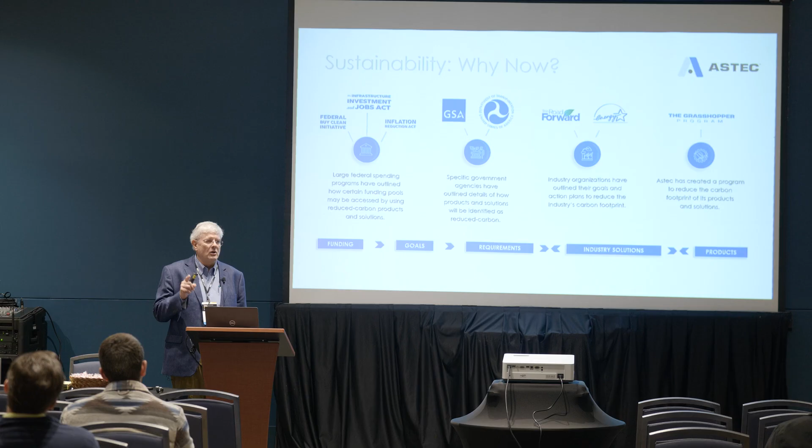So in this room right now are those who believe in man-made global warming. Not only believe in it, but believe that anything and everything that can be done should be done to address it. And it's actually a moral issue with those folks. That's one end of the spectrum.

There are other folks, undoubtedly in this room right now, who believe just the opposite. They believe it is total BS. They believe it's either at best a myth, at worst a hoax by the political elite on an ignorant public. Those are the two extremes, and there's everything in between. If you're like me, you're influenced by the last YouTube video you watched on the subject. But I say that to say this. Regardless of the facts, this is a fact also.

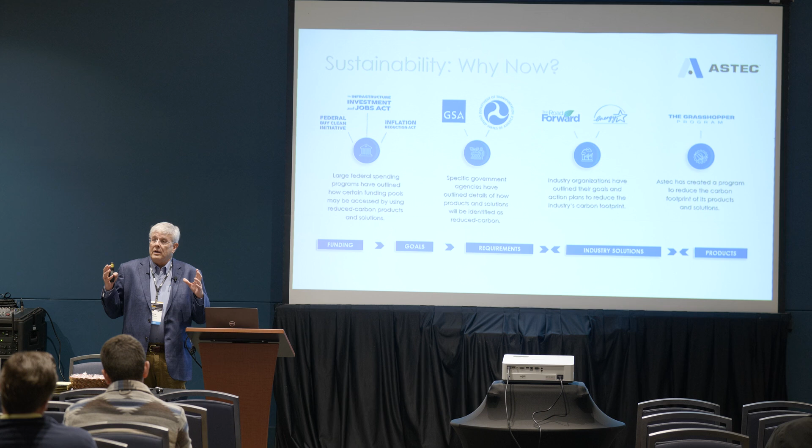There's a lot of changes, and these are some of the drivers in place for all those changes. I'm not going to read all of them, but these changes have the momentum of a freight train coming down our tracks. And our industry is being impacted right now, and it will only ramp up. Fortunately, my job is kind of cool in that I don't have to take sides. I don't even have to have an opinion on this subject. All I have to do is provide solutions to you folks that have Astec plants or have asphalt plants, period.

And so we're going to talk about what drives innovation. We're going to talk about what you can do today with your own equipment to lower your carbon footprint. For decades, we've talked about these things, but we talked about them in terms of make more money, be more profitable. Now it's how to lower your carbon footprint, because a lot of the things are the same.

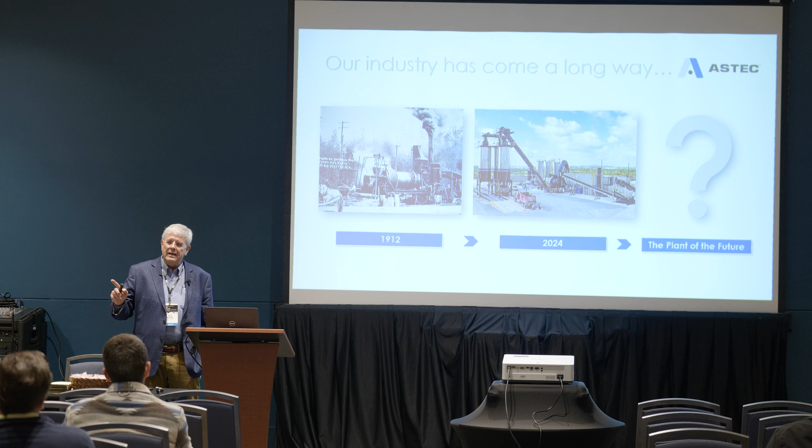So the plant on the left is kind of where our industry started with asphalt plants. That's a Warren Brothers plant, 1912. If that reminds any of you of the plant you have right now, we need to have a short conversation right after I get through talking. Now, the photograph in the middle, that's pretty much what asphalt plants look like now. And I'm going to attempt to tell you what they're going to look like in the future. My opinion is they're going to look like that, pretty much. You think, well, that's not very exciting. I've got some slides at the end that really show what they'll look like, but the main parts of the plant will look like that.

Technology, the application of technology. I was about to say, underneath the paint, nothing is the same. I doubt the paint is even the same. So, why am I talking about Mustangs? Well, I love Mustangs for one thing. But I say asphalt plants will look a lot like they look now, but the technology that drives these plants and makes them perform, I think will look a lot different in the future.

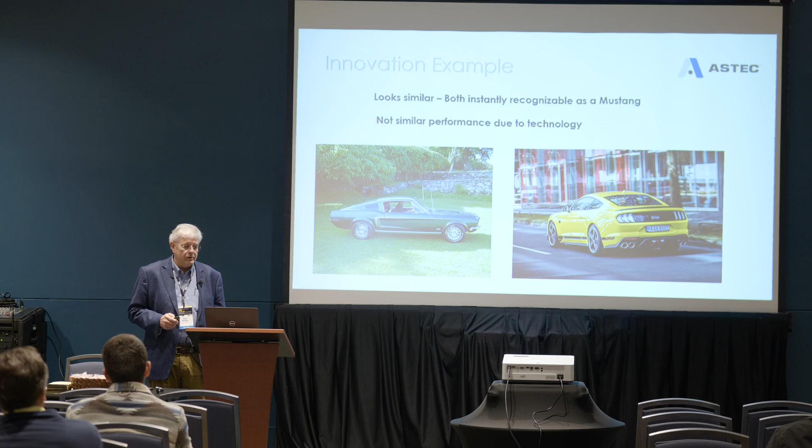Regulation is one. Now, regulation has touched people in different states, with whether you have to have lime and how you add lime to mixes and things like that. In California, it's touched in a big way, and we're going to talk about that a little bit. But in the future, regulation is going to be a big driver in things that we do when we design our asphalt plants, because you will need solutions for the regulations that will come your way. And of course, competition is always a thing.

So these things, economics, mix design, regulation, competition, they create a need. And we take available technology and we adapt and innovate, and we kind of put the new technology together like a new recipe. Here's an example I like to use. Uber. Uber was a disruptive technology to transportation. You'd have to agree with that. What is Uber? It was a combination of 3 existing technologies. It was nothing new. It was a different recipe.

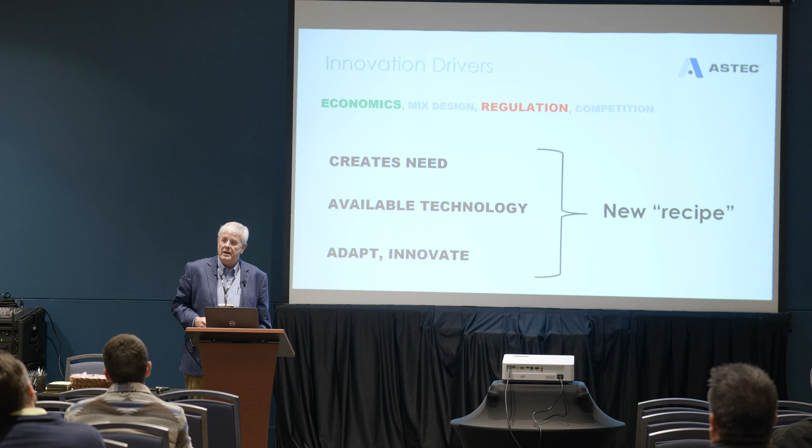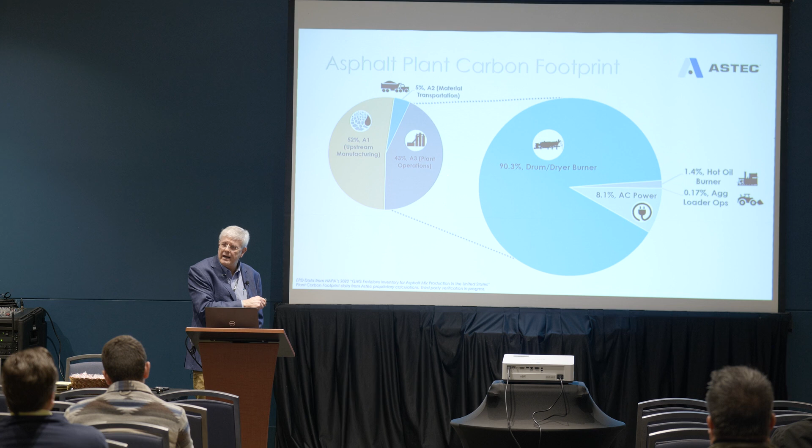So when we talk about the carbon footprint of an asphalt plant, and this is something we're going to see a lot in the future, we have the upstream, getting the materials, the manufacture of the aggregate and getting it to the plant, the transportation, and then we have the plant operation. This part right here, 43% of the carbon produced when you make a ton of asphalt is from the plant. The rest of it is from somewhere else. Well, we're going to talk about the asphalt plant today.

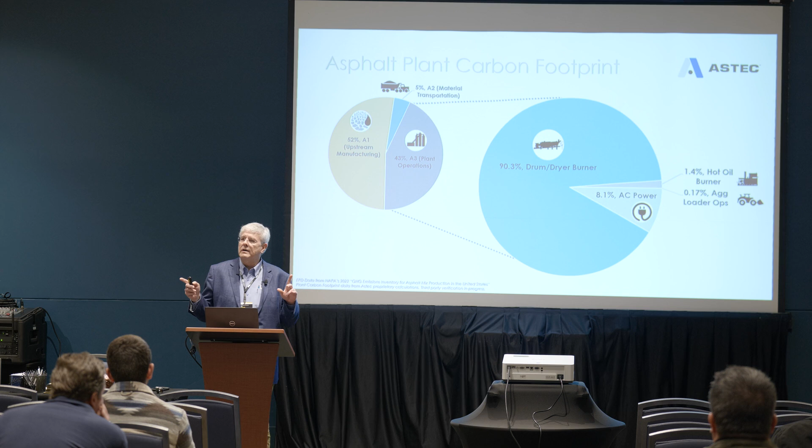Now, if we just look at that bit about the plant, 90% of the emissions or carbon that comes from the asphalt plant comes from the drum, the drying process. And it's important for us to have an idea of these percentages, because when you guys start thinking about, should I spend money on this, should I spend money on this, what should I do? You've got to have a foundation of understanding about whether it's really going to move the needle or not.

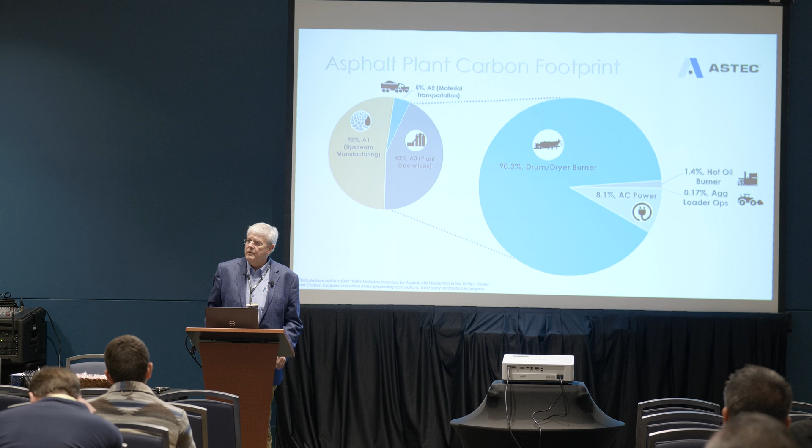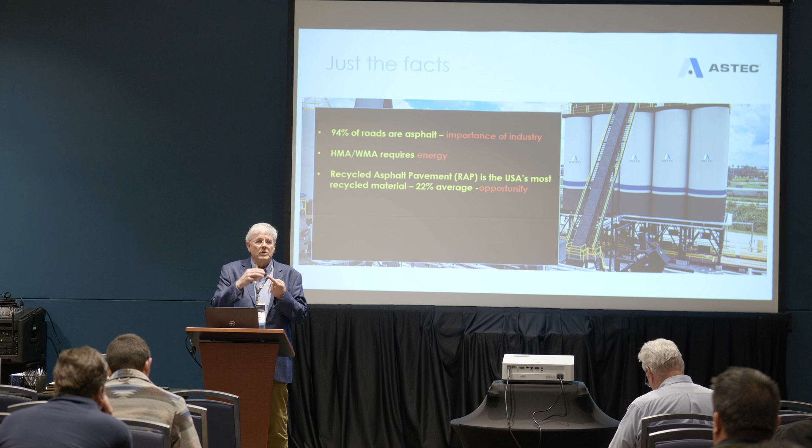You guys reply to surveys, and you say the 2 main reasons limiting you from running more RAP are specification and availability. The people that write specifications are going to get a lot of pressure to raise those numbers. So the people that have RAP will have opportunities to use more of it. We'll speak about that a little bit later.

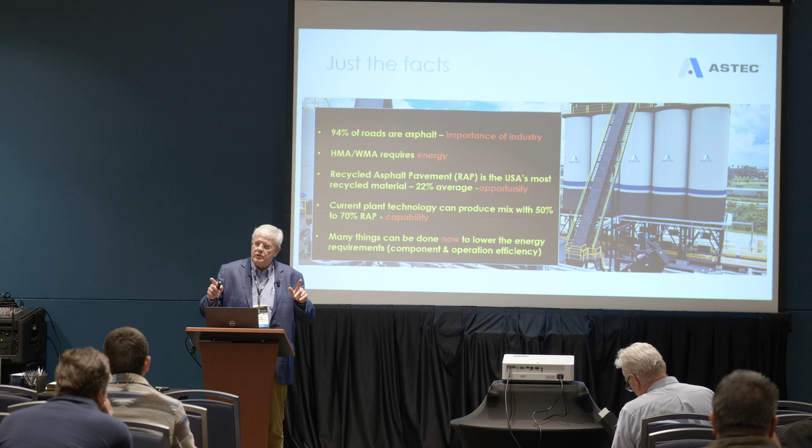Hey, here's some good news. Current plant technology, and I'm not talking about Astec, I'm talking about technology in general, can produce mix with 50 to 70% RAP. So we have capability. So our industry is super important. Yeah, it takes energy to make asphalt. We have a huge opportunity with RAP still. And our plant technology can run a lot more RAP than the average that we're running right now. And there are many things that can be done right now at your facility to make a difference.

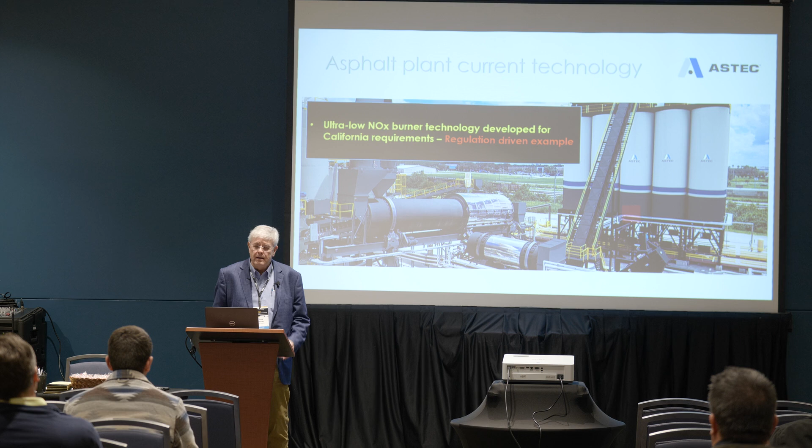Low NOx burners, ultra low NOx burners, have been the standard. You have to have that in order to have a plant in California, and that's been that way for 25 years now. 25 years. And why I say that, we're not in California. That's just an example of how regulation can drive. In a low bid environment, let's face it, you guys aren't going to do anything you don't have to do, because your number one mission in life is to get the bid. So you just can't start buying technology your competition doesn't have to buy. Regulation is the only time that everybody buys the same stuff.

In the future, well, for a long time, what fuels do you use? You use the cheapest fuel that you have available. Well, in the future, we will be told which fuel we're going to use; it won't be based on that. That's been the case in California for a long time. You run natural gas, or you run propane, and you don't run anything else.

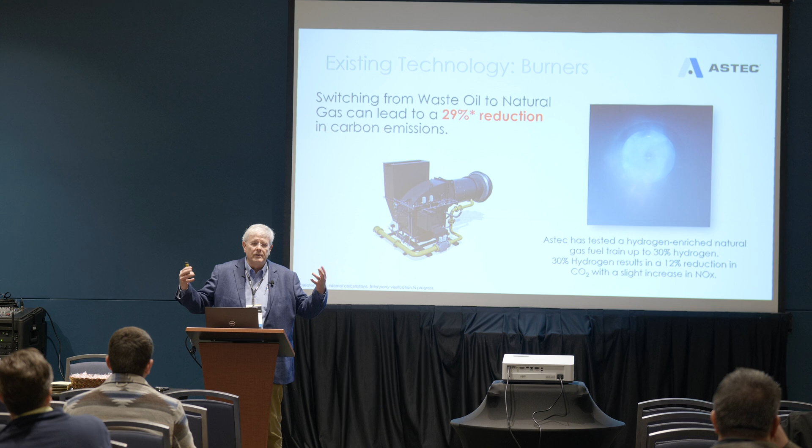Just switching from waste oil to natural gas, just to give you an example, can reduce the carbon emissions 29%. So as these facts start permeating through our society and people start knowing these things, we'll be mandated which fuels to run.

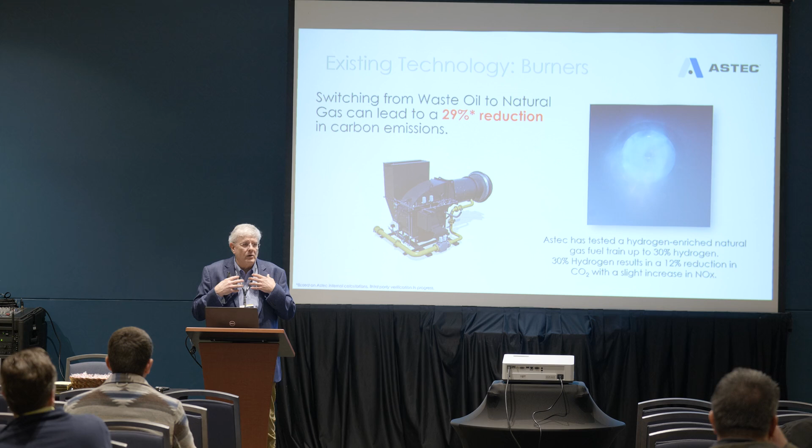There's a lot of talk in certain parts of the country and the world about running hydrogen through our burners. It's not hard as a manufacturer. That's not a challenge for us. We've actually run some trials. The challenge is having hydrogen supplied to your plant. If and when that ever occurs, we have the burners that are available to do that. Not a biggie there.

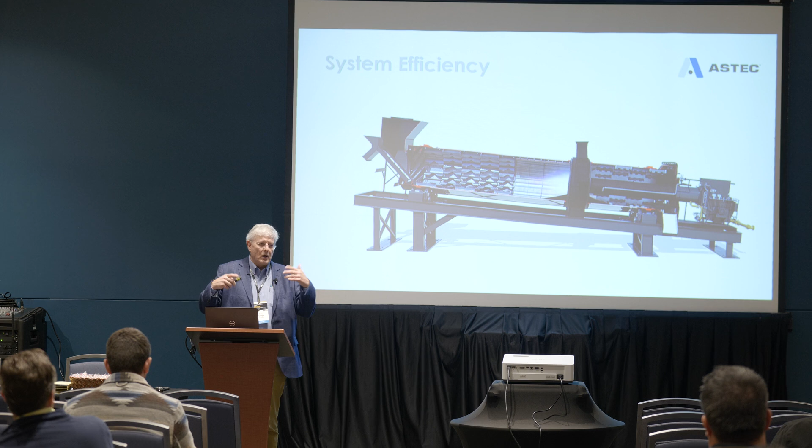Now, I said 90% of the emissions that come from an asphalt plant come from the drying process. What's going on there is we have cold, wet aggregate coming into the dryer. We have hot, dry aggregate coming out. Now, what goes on in the middle is important. The greatest part of our heat from the flame goes into the aggregate. Part of it goes into the steel.

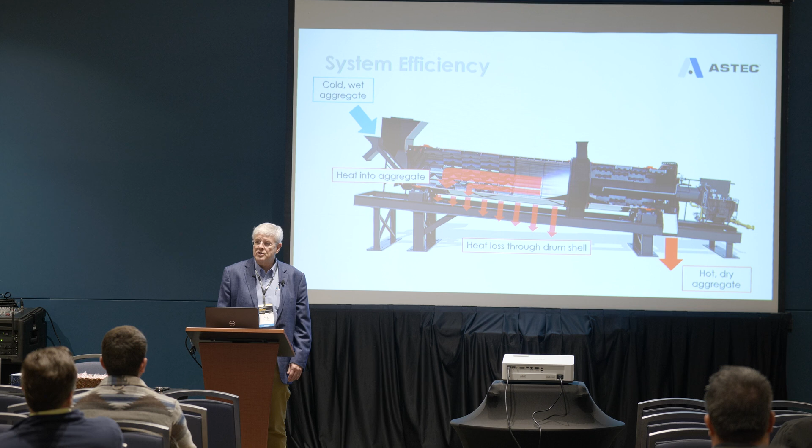Actually, everything that gets hot at an asphalt plant besides rocks, all the metal, everything that gets hot is a waste of heat. In a perfect world, only the rocks get hot, but we don't live in that world. So other things get hot. So it's our job to mitigate all the energy lost to that other stuff. Our drum shells get very hot, and they radiate heat away. We can insulate them. We're going to talk about that in a minute.

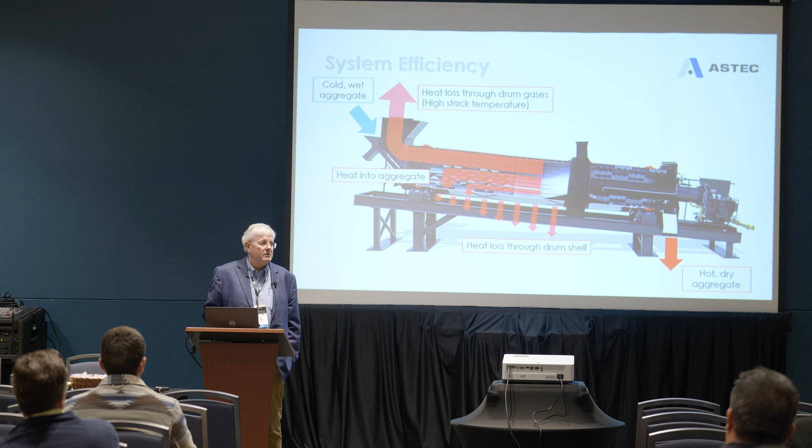The other part of the heat that leaves the process is the heat that doesn't go into the rocks. It goes out the dryer in the form of hot stack gases. Can we manage that? Yes, we can. We have technology now that we can manage that.

Now, how can we control the amount of heat that leaves the drum? In our industry, that's commonly called the stack temperature. That isn't the stack, it's really the temperature of the gases that go out of the drum, but using the slang of our industry, we'll call it the stack temperature.

Usually, we just live with the stack temperature. If it's way too high and our baghouse can't handle it, we do some things to the dryer to bring it down. We'll go through all those things. If it's too low, we do some things inside our dryer to bring it up. The problem comes in when you run both types of mixes, and now what do you do? Are you crawling the drum every day? There's technology that makes it where we don't have to do that anymore.

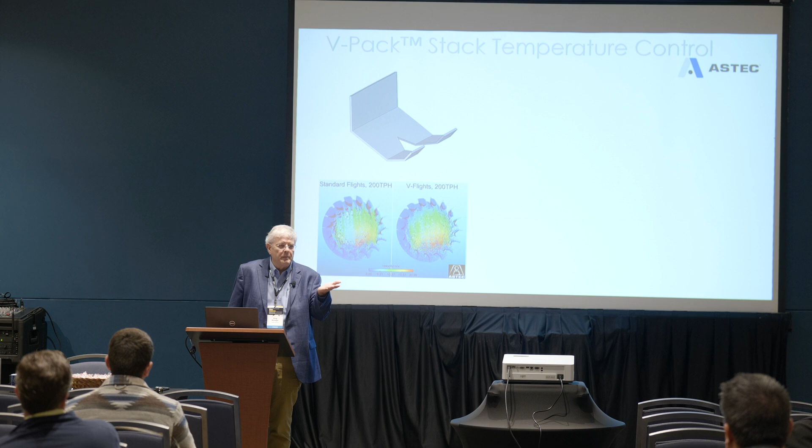We call it the V-PAC, but really it's just this. We have a design of flight that will shower pretty well if it's not that full of material, and it showers well if it's really full of material. And then we add to that variable frequency drive technology. We call it VFD, but it's variable frequency drive.

So the combination of those flights that work with low or high levels of material in the drum, and being able to slow the drum down slightly or speed it up slightly, enables us to bring the stack temperature down. That's energy that escapes. Bring that stack temperature down, or raise it up if we're getting in the danger zone of mudding up our baghouse. So from inside the control house, your operator now has control over how much energy goes into the rock and how much energy exits the drum.

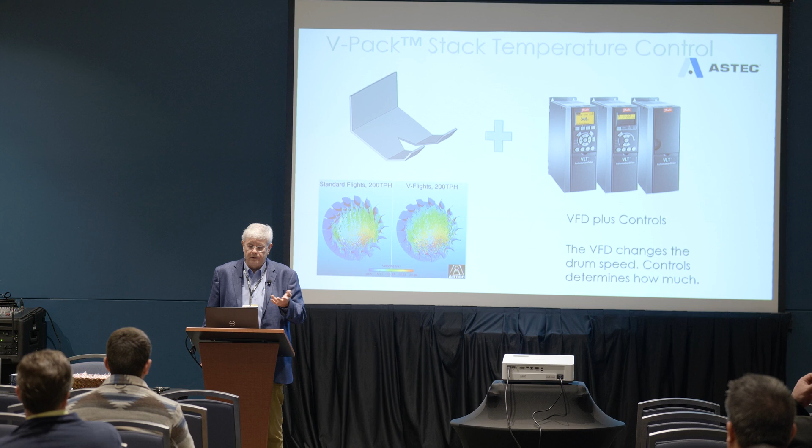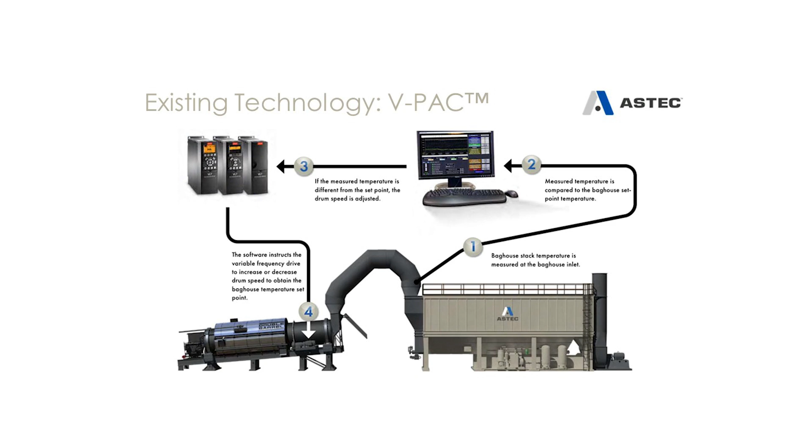In fact, I changed these slides just for this. We call it a stack temperature control, but you really could call it carbon control in today's climate, because that's really what it is. That's what it looks like schematically. We sense the temperature of the gases going to the baghouse. We've input to the computer what we would like the stack temperature to be. The VFD control changes the rotational velocity of the drum to either speed it up or slow it down to obtain that temperature of the set point. So we just have control over that part of our process.

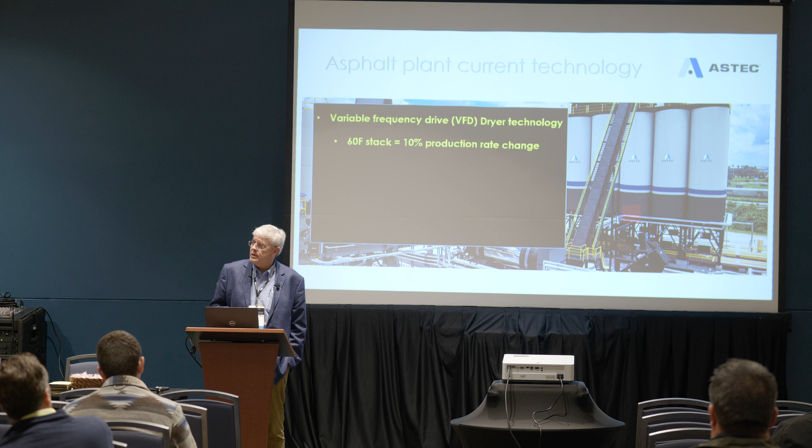Now, here's a number to remember, and I'll give you a memory trick that I use to remember these numbers. For every 60 degrees Fahrenheit that your stack temperature goes up or goes down, it'll make a change in the production rate of your plant of around 10%. It'll cut your maximum production rate around 10%. That could be in the bad direction, could be in the good direction.

For every 60 degrees Fahrenheit that the stack temperature changes, there will be around a 4% change in the fuel required to make that 1 ton of mix. It could be more fuel or less fuel, depending on whether the stack temperature is going up 60 degrees or down 60 degrees.

Also, the things that we used to have to do when we crawled inside a drum at night, in the dark, in hot drums, there's no way to do that safely. I don't even know another way to say it. So there's that aspect too. And this can also affect the maximum production rate. It can easily take a 250 ton an hour plant to a 300 ton an hour plant, and you can get more tons out that day for the same fixed cost.

Now, how do you remember all that? Here's how I remember it. For some reason, 60, 10, 4 are three numbers that are easy for my brain to hang on to. 60 degrees Fahrenheit change in the stack, 10% on the production, and 4% on the fuel. 60, 10, 4. Everybody got that?

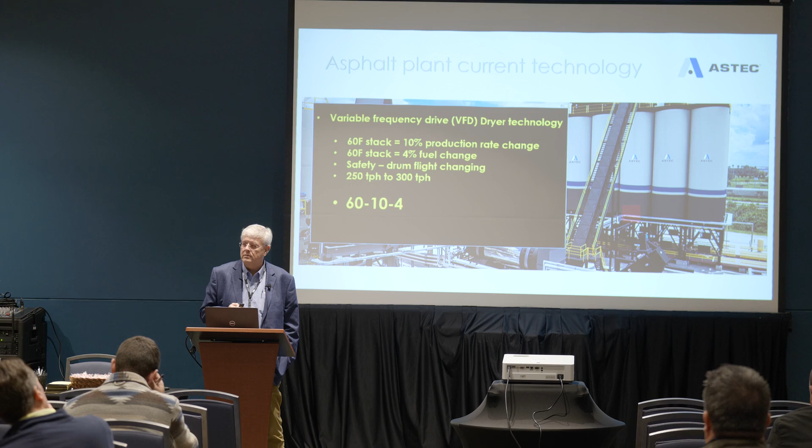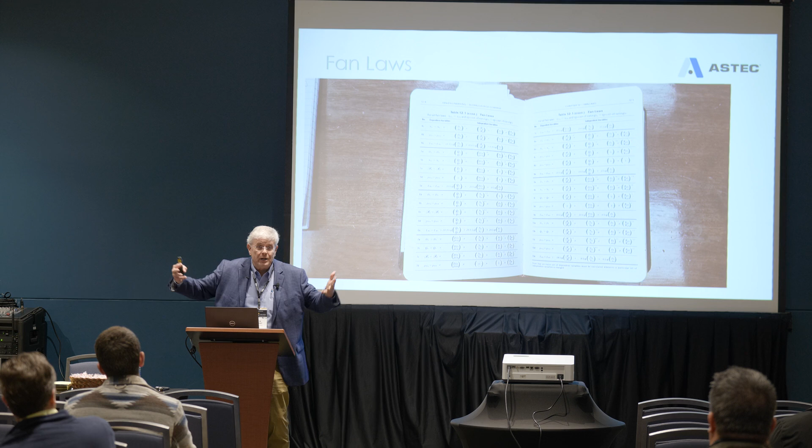Okay, this is a photograph of a book that was sitting on my desk. It's the fan engineering book. It's the Bible of fan engineering. And on these 2 pages are mathematical formulas called the fan laws. And I photographed it and stuck it in here. What these fan laws tell us is, when we use VFD technology to speed up or slow down a fan, how does it affect the output, CFM of the fan? How does it affect the static pressure that the fan produces? And how does it affect the power required to run that fan?

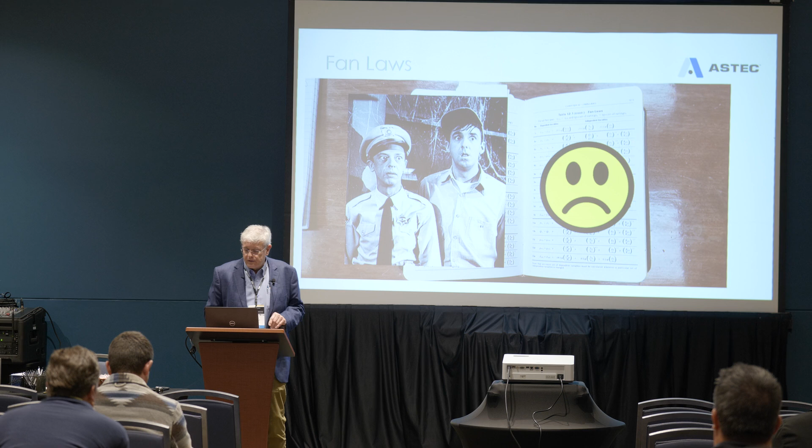And this is important to know. And what I thought we would spend the rest of our time doing is going through each and every one of these formulas so that you understand each one by the time you leave here. You ready? Yeah. That's often the look I get, and this is how you're feeling right now, so I know that. Here's what you have to know.

For a centrifugal fan, let's say your baghouse exhaust fan, if you use VFD technology to speed it up or slow it down to match your plant production, if you slow the exhaust fan down to 80% of its top end speed, it only requires 50% of the electrical energy to run it at that point. If we slow down a centrifugal fan, for example, the burner fan, if we slow it down 50%, which is like every day at your plant, it only requires 12.5% of the energy. Those are like crazy savings.

There's lots of other benefits on those exact drives too from using that technology. But this technology is commonly available from many manufacturers. It's affordable, it's reliable. All new plants just have this, but there's not hundreds, there's thousands of plants in the United States of America that don't have this technology because they didn't come with that technology. So, okay, I've talked about the math of it and what it means for energy.

To me, the best way to describe the difference between using speed up or slow down technology on a centrifugal fan versus an outlet damper, which is basically what we've been using for 100 years: if you're in your vehicle driving down the road and you kept the accelerator to the floor all the time and you used your brake to modulate the velocity of your vehicle, that would be insane, wouldn't it? But that's like using an outlet damper on a fan.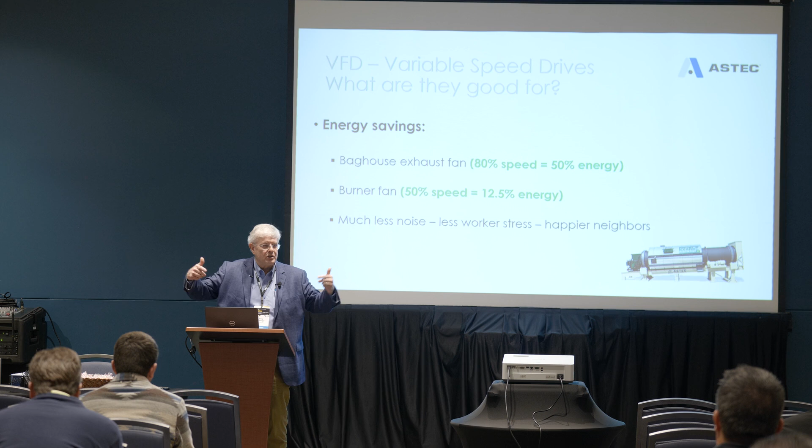The way you really drive it, you vary the speed of the engine pretty much. We'll forget about the transmission. You vary the speed of the engine. That's like using a VFD to speed up and slow down the motor on your baghouse exhaust fan. Huge energy savings. So these are things that we can do now on your existing plant.

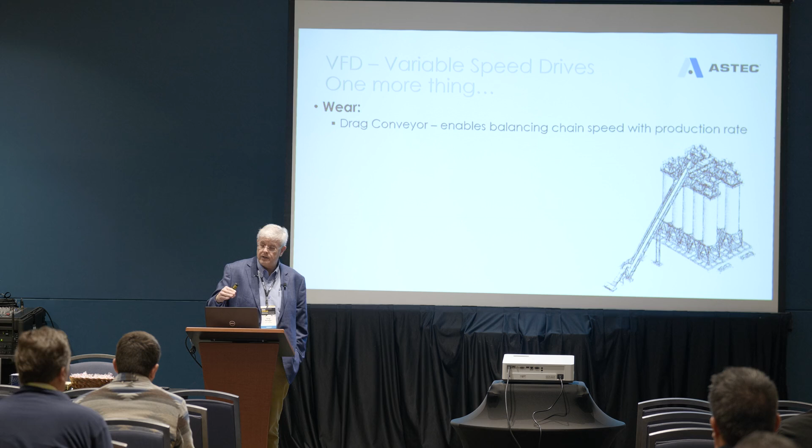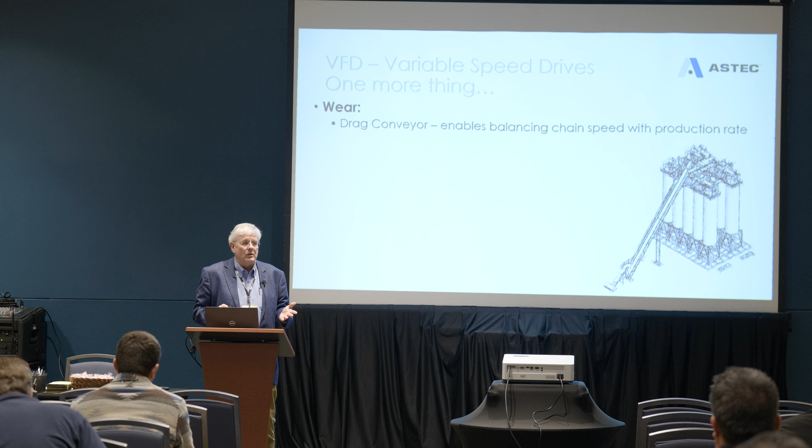Other places that VFD technology is used on plants, not so often, but we do have very successful customers who do this. They will use a VFD on their drag conveyor, the drag slat conveyor that takes the mix from the drum all the way up to the top of the silos. And what that does, it slows the speed of the chain down to match the production rate, so that basically you don't run the drag any faster than you have to for the production rate.

It doesn't really save any energy. It's really done to decrease the wear. And most of our customers who do this, they tell us they have about 40% less wear on their drag. Does that relate to carbon in any way? I think it does. It's not a direct thing that you can measure. It's not like you can tell some regulator, hey, I used to use this much fuel to make a ton of mix, now I use this much. But anything that lasts longer is a very carbon-friendly thing. So less maintenance equals less carbon.

Go electric. Electricity is not the cheapest way to keep things on your plant hot. In most places, it's not. Hot oil is. That's why most of you guys use hot oil. But in the future, this industry will be using electricity everywhere it can be used. When we sell plants in Europe, we don't even talk about hot oil. It's going to be electric in Europe.

And in fact, what we're seeing is asphalt contractors who may be in this room right now, who are owned by European corporate entities, are telling their plants right now, switch to electricity. Well, it costs more. We don't care. Switch to electricity. So that's even happening now. I've talked to contractors. We've had that very conversation.

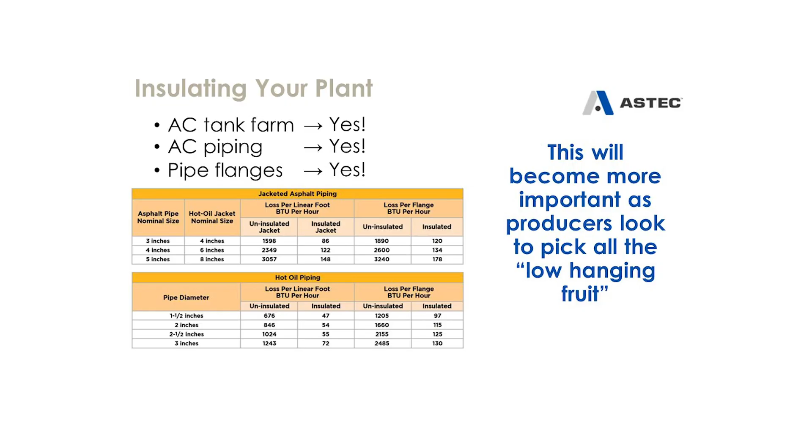So what all can be electric? Well, the AC tanks, of course. Even the hot oil heater can be electric. Even if we stay with hot oil, the hot oil heater can be heated electrically. The AC piping, the things on the plant that we have to keep hot, like the drag slat conveyor, the silo cone, those are electric now as a standard. The traverse and slat conveyors on top of the silo, all of that can be electric, like now. And the AC tank farm, the AC piping, the pipe flanges, all of that is yes, yes, yes. You don't even think about it.

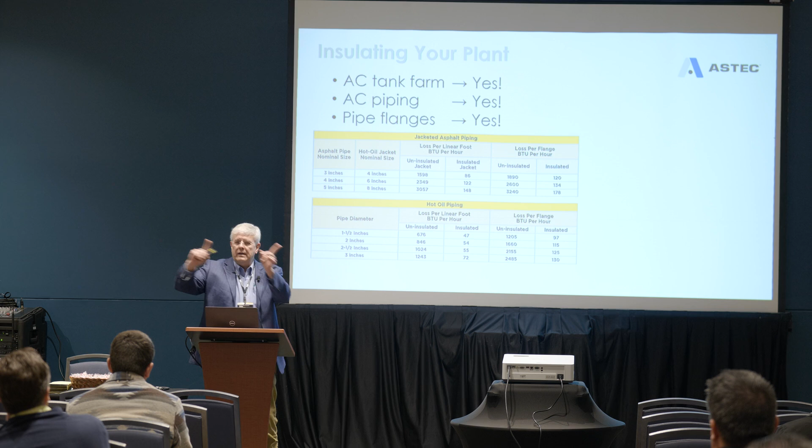Insulate those things. Even if you're in the category of you don't believe any of this man-made global warming, you want to do that for profitability. There are piles of data on how many BTUs you lose per foot of pipe and on pipe flanges, but just do it.

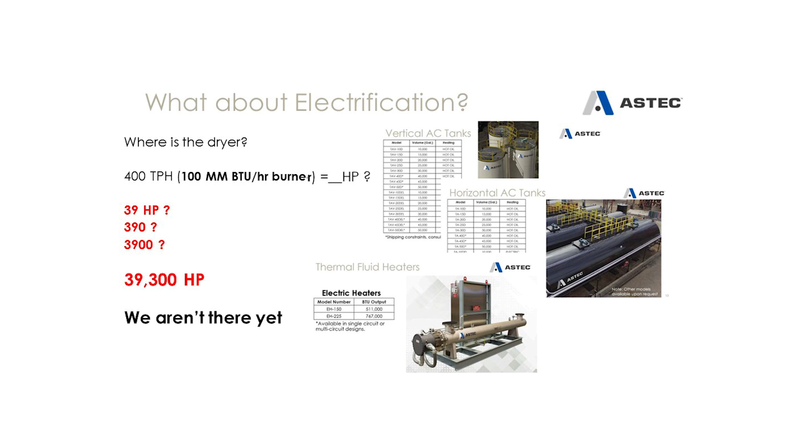Now, what about electrification? Of course, we've listed the components that are available right now. Well, you're thinking, he told us that 90% of the carbon produced when you make a ton of asphalt from the plant side comes from the dryer. And we can do things to make the dryer more efficient. And efficient in this context means make more mix with less fuel. We can do these things. So where's the dryer on here? I wish one of these cut sheets was about an electric dryer.

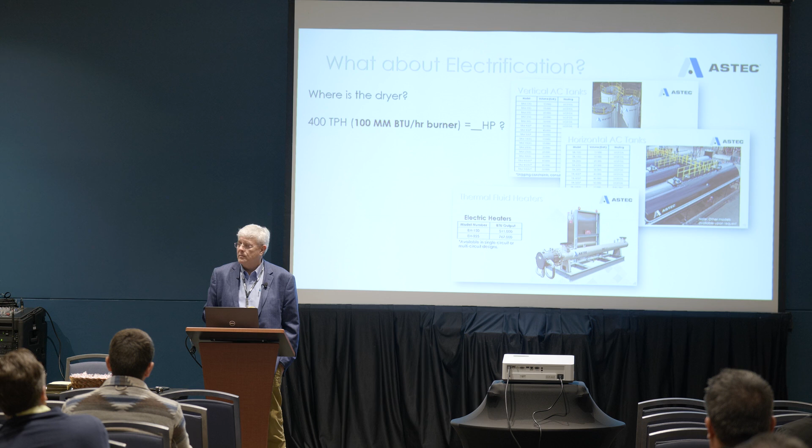But on a 400 ton an hour asphalt plant, on your 8-foot double barrels, the size burner on there is 100 million BTUs an hour. So what does that mean? It's hard to relate to that number because it's hard for our brains to wrap around BTUs per hour. But we can convert that number, 100 million BTUs per hour, to units that we're familiar with. Like we're all familiar with horsepower. We basically know that our vehicles have a couple of hundred, maybe 300 horsepower. Okay, so if we convert 100 million BTUs per hour to horsepower, what do you reckon that number is? Is it 39? Any takers?

Nobody wants to raise their hand for 390. Is it 390? 3,900? I saw a movement there, but you're scratching your head, weren't you? It's like an auction. I'm looking for movement here.

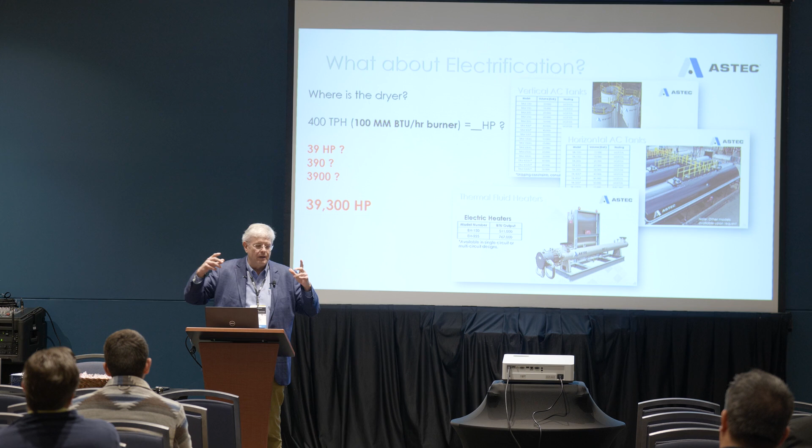Actually, if we converted that to horsepower, it would be 39,300 horsepower. That's a crazy number. That just illustrates really the beauty of an aggregate dryer, rotary aggregate dryer, direct heat transfer, burning an inexpensive hydrocarbon with a very inexpensive burner right there. How much energy is transferred in that small space that if we had to do it with electricity, that's the horsepower that it would take to do that. So we aren't there yet, okay?

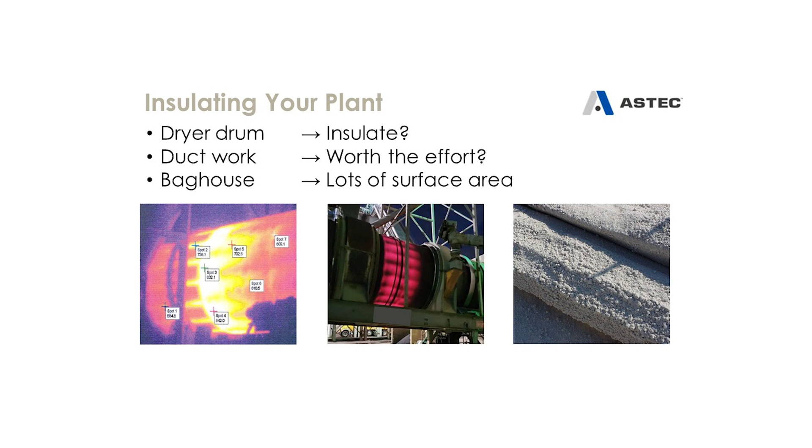What can be done now? Okay, insulate everything that gets hot? Almost. Almost. Why wouldn't you want to insulate everything that gets hot? So let's look at the drum for an example. I'll ask questions through here, but I'm going to go ahead and give you the answer to almost every question you could be asked about an asphalt plant. The answer is it depends. That's the answer to almost everything.

So, here's a couple of photographs of a dryer. The one on the left is a thermal image. Each temperature shows up as a different color. We have a special camera that takes these photographs. Right there, it's 842 degrees Fahrenheit. That sucker is hot. That's radiating. We're wasting heat like crazy right there, aren't we? Looks like we would be. So is it pretty obvious that we should insulate that drum? That's a question. Should we insulate the drum? Well, I just told you the answer to everything. It depends. Okay, thank you.

Well, that's 842 degrees, and I don't know if that's even hotter with a different mix or a different firing rate of the burner. It could get hot. I don't know what that drum is made out of. I don't know what the temperature limits are. I do know a couple of things. I know 3 things for sure. If we insulate it, it gets even hotter. We do know that. If we insulate it, we cannot see any signs of heat damage until it's too late. If we insulate it, we can't measure the temperature of it. So, what do you say? You still want to insulate it?

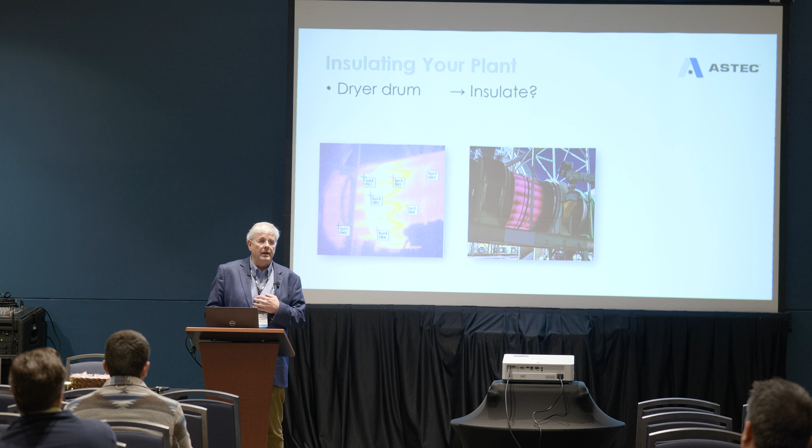It depends. You know, hey, it's an opinion. My personal opinion is, no, I'll take a hit on the inefficiency. It's probably 2-3%. It's not a huge number. What if you tried to insulate it with some type of liquid? Heat recovery. That is really the best thing to do to things like this. It costs more. Basically you put a shroud around it and suck heat off and use that hot air as something else. That's the smart way to go about it. You win the prize.

This is another example. That's not a thermal image. That's just what it looks like at night. And you know, hey, intuitively, it's hard to look at those and not want to insulate them, if we're really trying to make things more efficient. But I'm giving you these little case studies, and I just want you to think about things a little bit differently when you look at them when you leave here. Not everything is just so obvious.

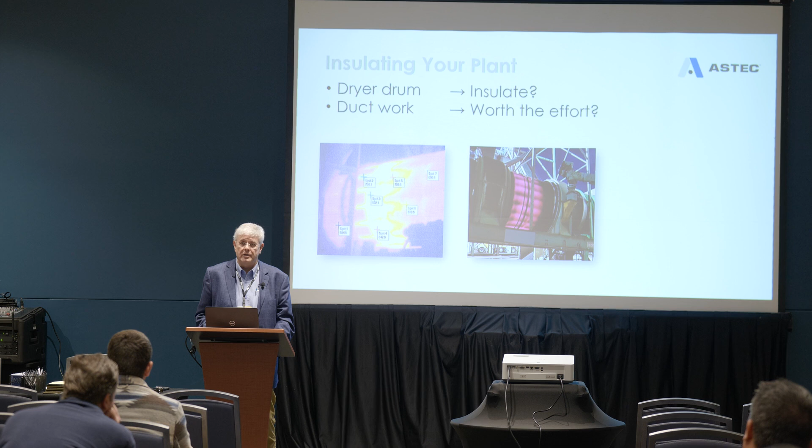Ductwork. Yeah, should we insulate the ductwork? There's a lot of it, a lot of surface area. Heat transfer occurs through surface area. I don't know. I would say not. But here's the thing. Probably in the future, there's a very good chance that the answer will be yes.

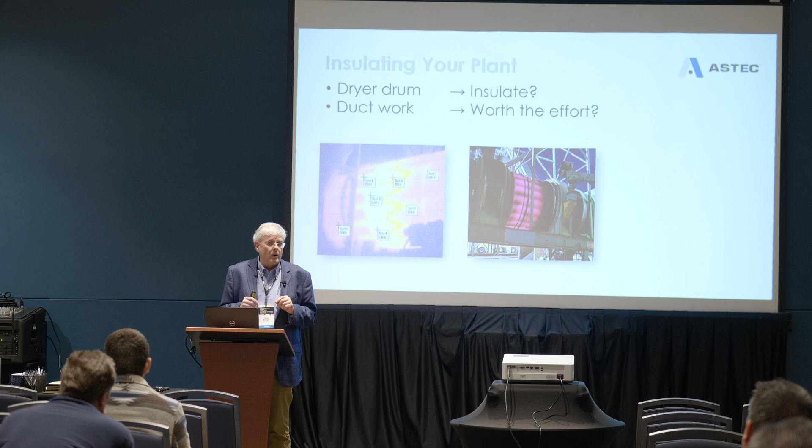We do customer schools in Australia. I spent last September in Australia doing customer schools. And after one of the classes, one of the Australian contractors came up to me. He had a stack of paper like this. In order to bid on certain government jobs in Australia, he had to fill out all that paperwork. And it was basically a check the box. Have you done this? Have you done this? So in the future, as the regulation picks up steam, if it picks up steam, we may be insulating things at our plants that we never dreamed of, and it doesn't really make sense to, because you want to check the box to bid on a certain job. So that's where we're headed.

I didn't come here to cheer y'all up, sorry.

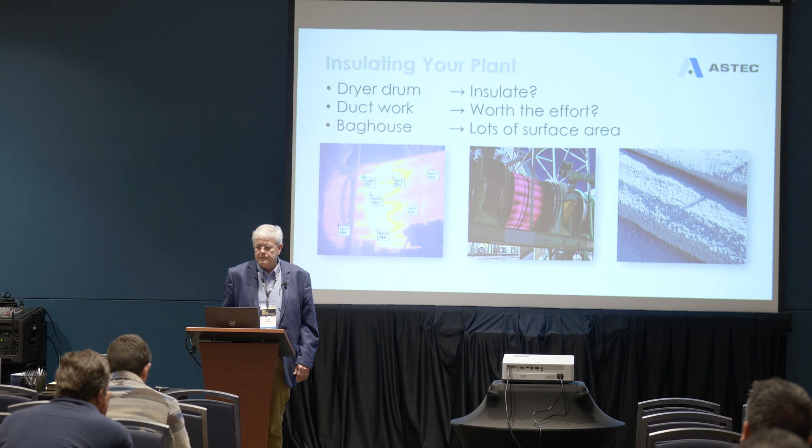Bag house, lots of surface area. Insulating it is probably a good idea. If you live in a cold climate, it's probably a great idea. So I would say bag houses of the future will all be insulated.

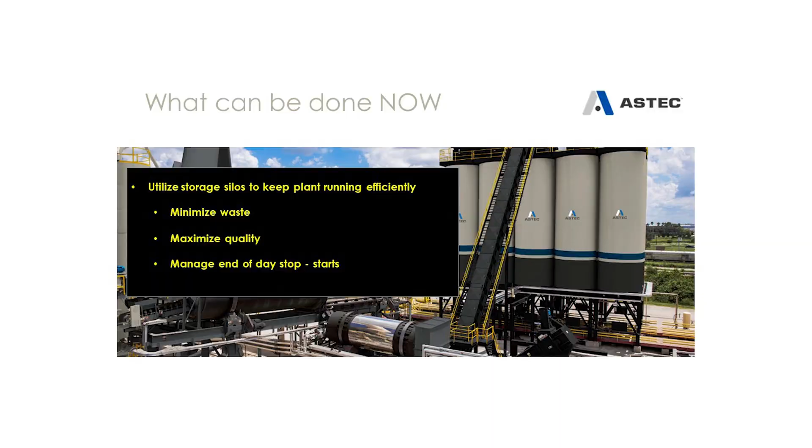So what can be done now? Well, a lot of folks have storage silos, and they're used like surge bins. They're only used to keep the plant running while trucks aren't there. That's great, and that's what you want to use them for, but you can make a lot more money by using them as a storage system. That's another talk, but using them to keep the plant running efficiently. And the next slide is going to kind of highlight what I'm really talking about there.

By keeping that plant running, and what I mean is communicating with your customers who are going to buy a mix tomorrow so that you know ahead of time. You can plan your day. You can start with the finer mixes and transition to the coarser mixes and keep that plant running. No midstreams, no shutdowns. That's the most efficient operation. It will produce the least amount of carbon for a ton of asphalt. The quality of the mix will be the best because the highest quality mix you'll ever make is when everything is happening consistently and continuously all day long at a continuous asphalt plant.

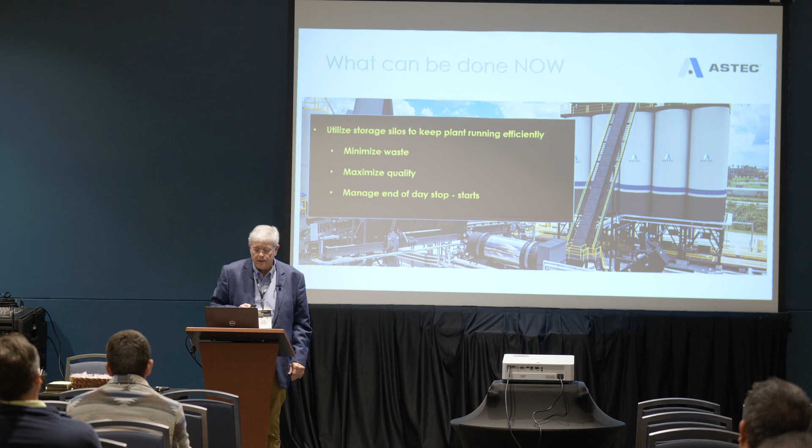And manage the end of the day stops and starts. We see people start up and shut down with barely a wheelbarrow of waste mix. We see people fill up one or more trucks when they start up a plant. That is not an efficient operation at all.

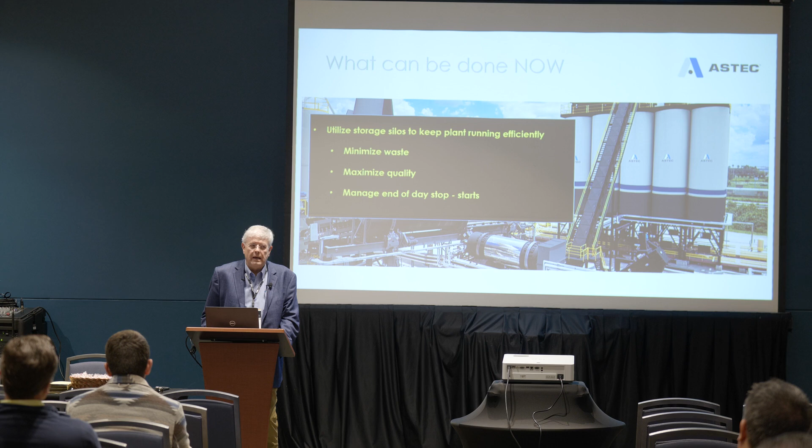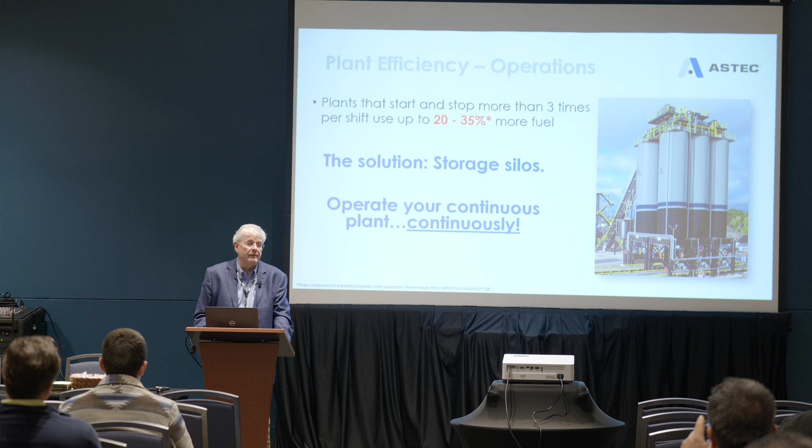This next slide comes from a colleague and a friend of mine, and he's very famous in our industry. His name is T.J. Young. He runs the operation for Duval Asphalt in Jacksonville, Florida, and he's been a consultant forever. This is one of his slides, and I have no reason to doubt its validity. I'll read TJ's slide: plants that start and stop more than 3 times per shift use up to 20 to 35% more fuel. That is an amazing number. And I believe it. I've shown that number to other contractors, and they say, yeah, I believe it. So there it is.

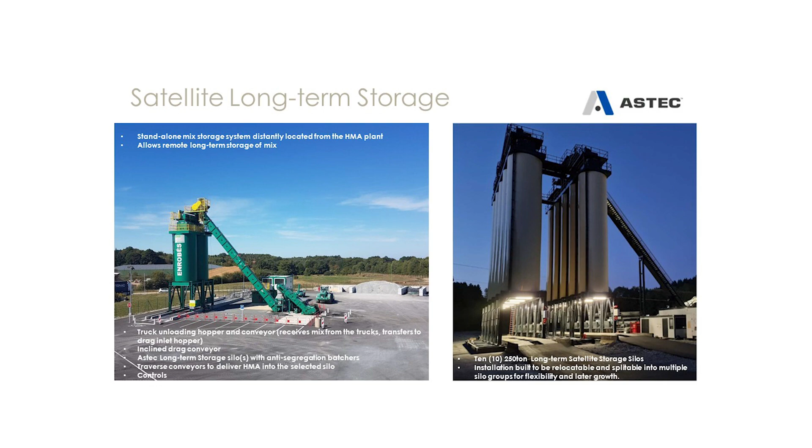Here's a product that we've never sold in the United States, but it is fairly popular in Europe. I'll just throw it out there because it's a solution that one part of the world sees value in, just to let you know it's out there. We call it a satellite system. It's specially designed storage silos that are able to unload mix from a truck quickly into those silos. There's no plant, there's no production. This would be located in a city center somewhere.

At low traffic times, trucks during the night would haul mix and fill these silos. Then during high traffic periods, during the day, the mix is used on inner city jobs. So, just to let you know, there are some solutions out there that other parts of the world utilize. That's a little system on the left, and that's a 10 silo system on the right. There's no burner, and the permitting is nothing like it would be for an asphalt plant.

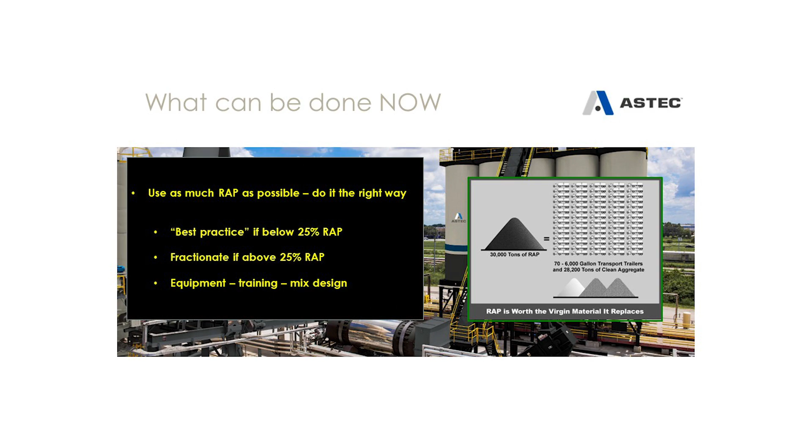Our industry, I think, will be allowed and encouraged to run more RAP than we're allowed to use now per specification. It's incumbent upon us to do it the right way. What does the right way mean? The right way is not to make mix that is just as good. It's to use the science of mix design by guys like Brian Prowell over here to make mix that's even better. The NCAT 2009 test track results prove that this can be done. Not just as good, but better.

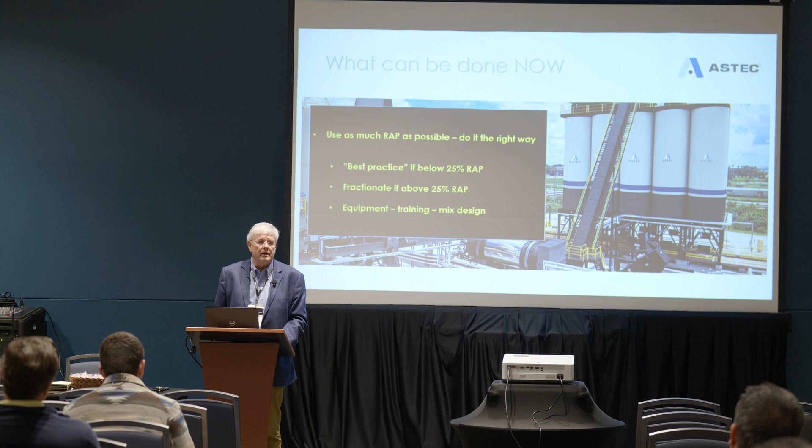And at what point should one fractionate RAP? I guess that's open for discussion and disagreement, but certainly somewhere around 25% RAP in the future, in order to make mix that's not just as good, but even better. As an industry, fractionation of RAP, I think, will have to become a normal thing instead of what we have now. The plant equipment has to be there for high RAP. The plant personnel must be trained with best practices on how to operate that equipment to run high quality, super quality, high RAP mixes. And of course, the mix design has to be there as well.

Any comments on that, Brian, since you're here?

No, I mean, and I think 25% is a good one. You know, below 25% is pretty easy, anybody can do it. Above 25% is when you got to start paying attention, but it's very doable. Thank you.

When we look at a pile of RAP, a big ugly pile of RAP, our industry brain should convert it. What we should see instead in our mind is 70 6,000-gallon trailer loads of virgin AC and 28,000 tons of virgin aggregate. That's what you should see when you look at RAP, because that's what it replaces. It's basically worth what it replaces.

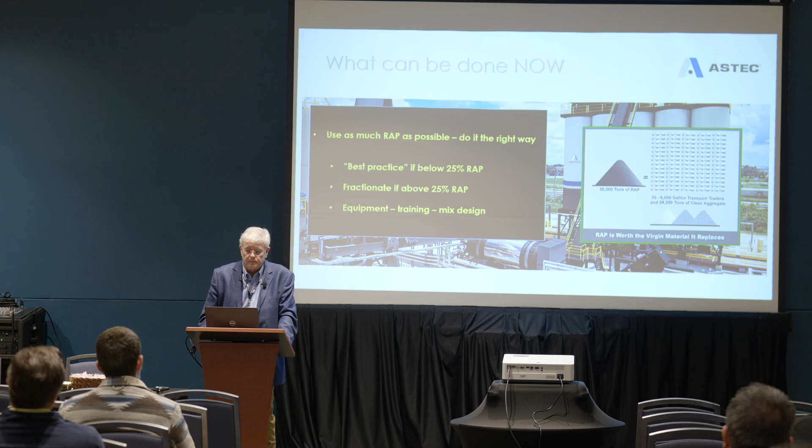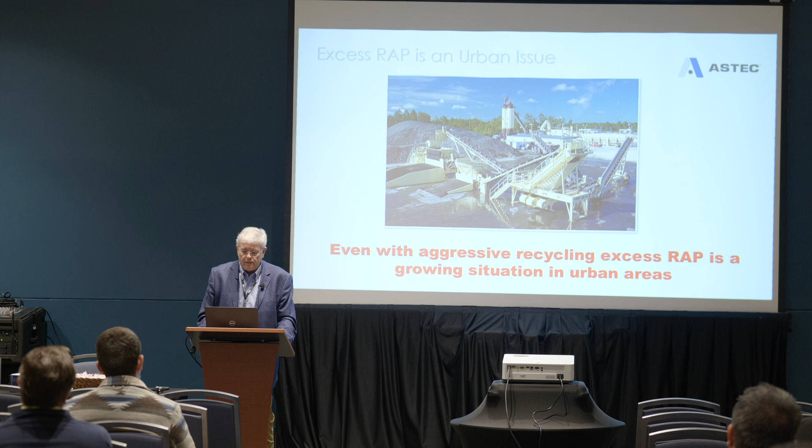There are places in the United States who don't have enough RAP, and there are other places that have mountains and mountains and mountains of RAP. They've even named their mountains, Mount Rapula, and names. They have little red lights on top of them so aircraft won't crash into them. For those places who have so much RAP that they'll never use it in all the mixes that they run, there are other products to be made with the RAP.

CCPR, Cold Central Plant Recycling, is one of those. That's a whole nother presentation. I'm just throwing out some solutions. It basically uses no energy. It's no heat energy. It's a 97% RAP product. And when you go do a Walmart parking lot, instead of somebody else doing 8 inches of rock base, you do 5 inches of the CCPR. It's an additional product for asphalt contractors to sell.

Warm mix asphalt. Everybody talks about it, nobody does it. But as an industry, I don't know if it'll be 5 years or 3 years or 7 years. We are all going to be using a technology, whether it's foam or one of the various vendors who have chemical solutions in the exhibition hall. We will all be not just using that technology, our whole industry will be using that technology to make significantly cooler mix than we make now.

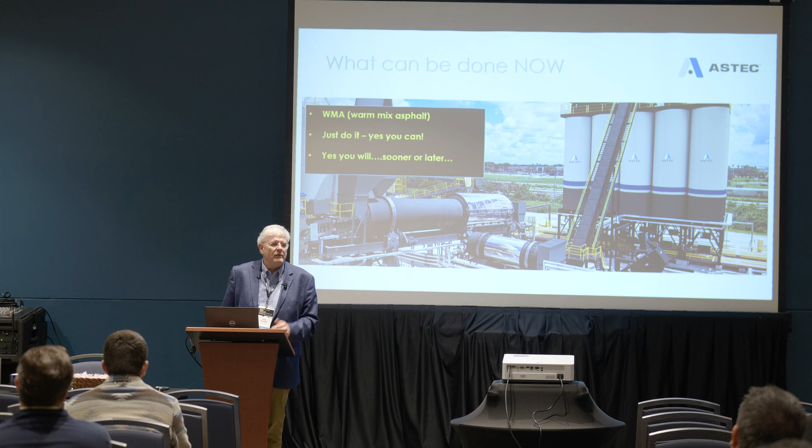I'm almost out of time. Pretend in your mind that you had never made hot mix. You had always made mix at, let's say, 270 degrees. You've never seen mix smoke before. You've never even smelled mix before. Pretend, put yourself in that spot.

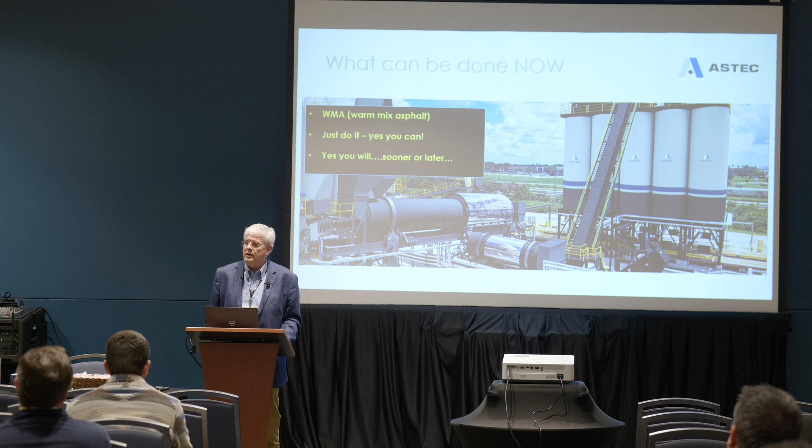And I'm a salesman, and I come to you and I say, okay, hey, we're going to make some hot mix. You need to make it a lot hotter. You say, how come? Well, hey, listen to this. It's going to smoke like crazy. Your workers are going to hate it. The neighbors are going to hate you. It's going to cost a lot more to make. What do you say? I'm insane, right? That's where we are as an industry. So you just kind of reverse that and see where we're going to go as an industry.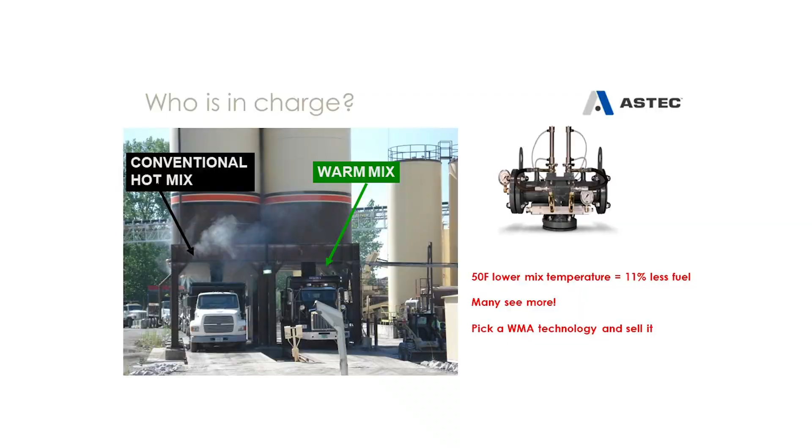This is June of 2007. Astec, a local plant in Chattanooga, made a 50% RAP in warm mix, and this is what it looked like. The silo on the left is conventional hot mix that they made every day for everybody, and that's pretty much what it looked like every day for everybody. And the warm mix is what it looks like on the right.

There's less energy. If you work out the thermodynamics and you lower the mix temperature 50 degrees, you just cut your dryer fuel bill by 11%. We actually have contractors who've told us they've measured more. I don't know how. The thermodynamics is 11%, but we have people tell us more. I can't explain it.

There are places in the United States where this doesn't really matter, but there's a lot of places, like east of the Mississippi certainly, where this makes total sense. We can easily manage out 1 to 2% of moisture, which are huge energy savings.

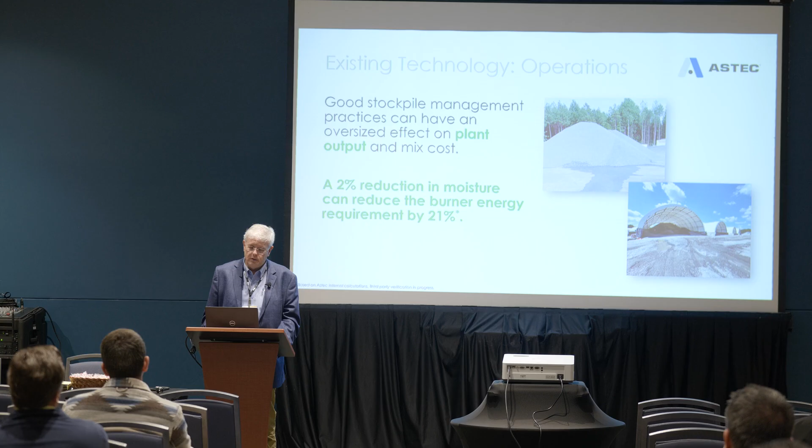So we'll wrap it up here. You know, when we start lowering the carbon footprint in our industry, it's not just going to be you buy this thing and you're done. It's no silver bullet. But here's some scenarios.

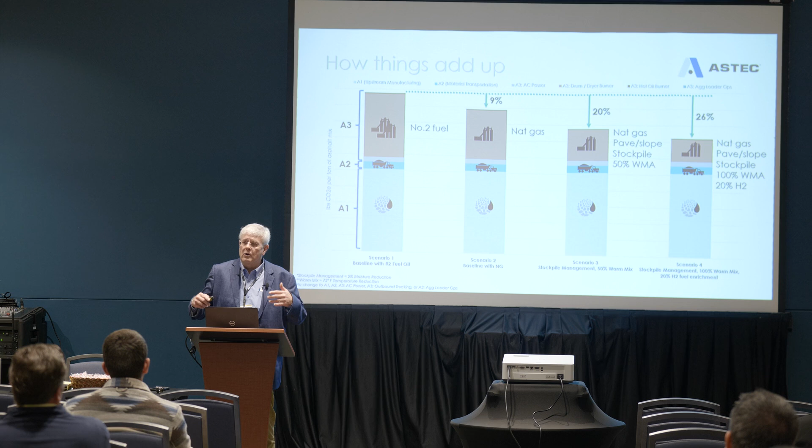So all along the way, it costs you less to make a ton of asphalt. So a taxpayer dollar buys more roads, or however you want to look at it. So far it's mainly good news for us. Plants of the future, what might they look like? They might look like this. We assist contractors in getting plant permits, not out of the goodness of our heart, but to help them purchase the plant. And it is getting tougher and tougher every year to get permits for asphalt plants.

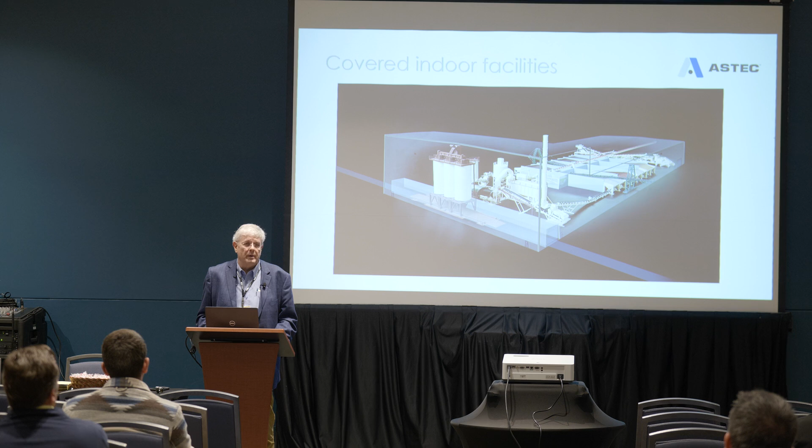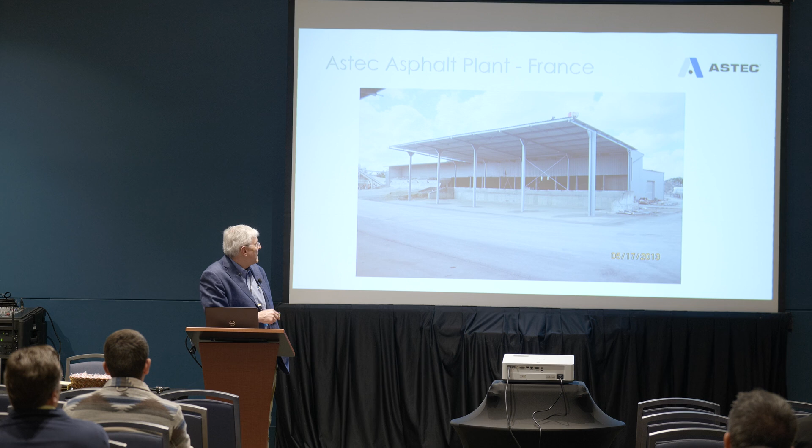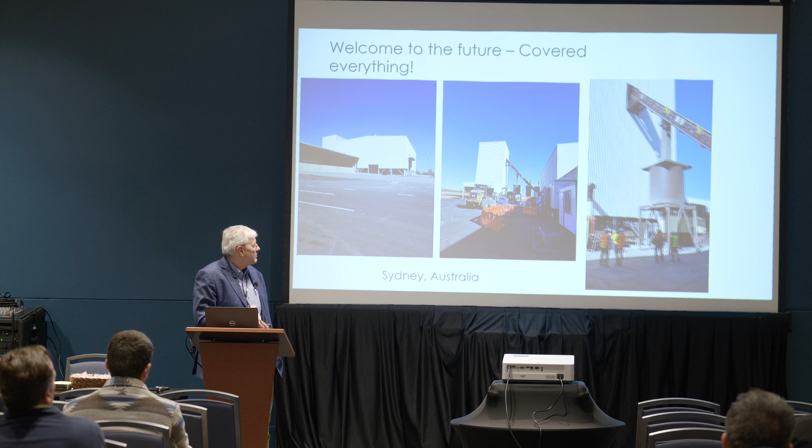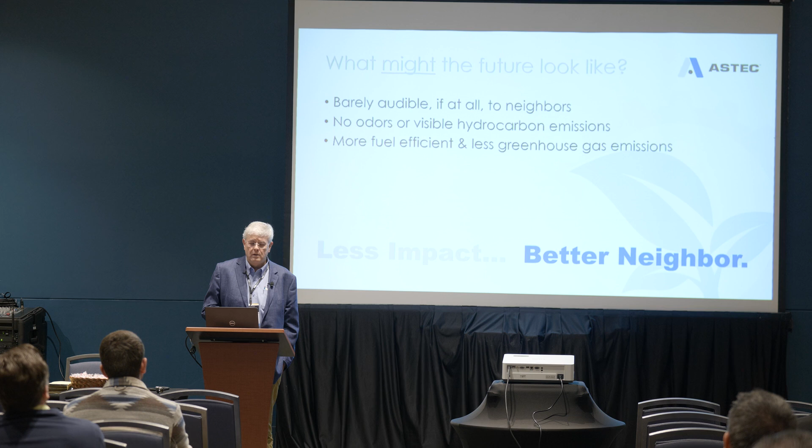So what might the future look like? Your plants will be barely audible, if at all, to your neighbors. There will be no odors or visible hydrocarbons at all. Much more fuel efficient, lower greenhouse gas emissions, mostly electric, covered or partly covered facilities, including stockpiles. What will the future look like?

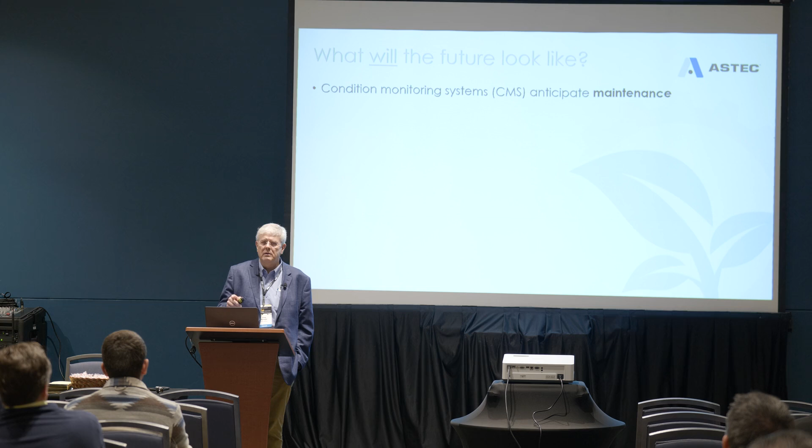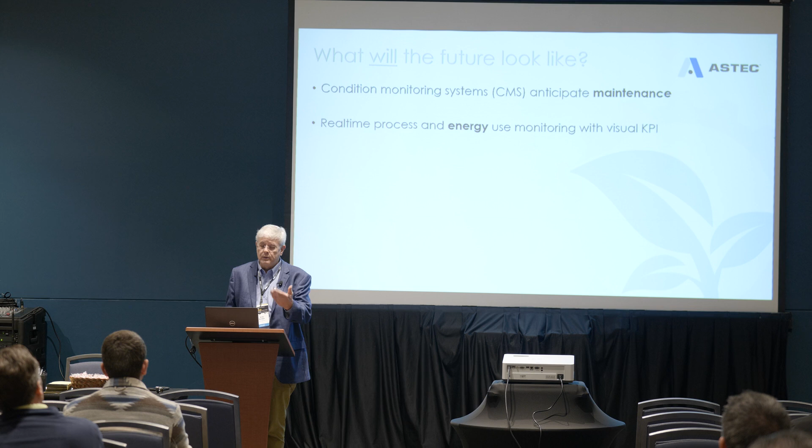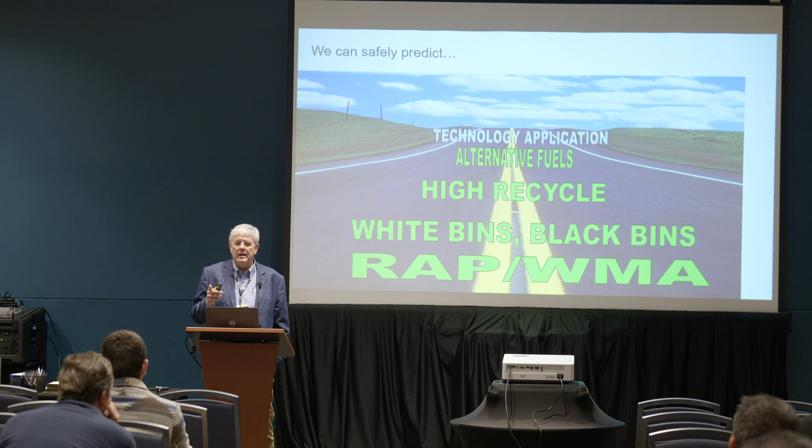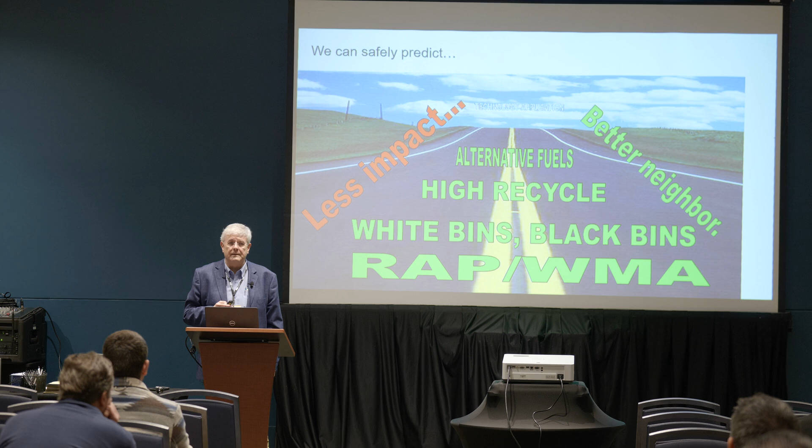So looking down the road, we're going to see more RAP. We're going to have to really make warm mix. We're going to have almost as many RAP bins as we do virgin cold feed bins, higher recycle. We're going to see alternative fuel. We're going to use fuels we never thought we'd have to use. And we're going to see the application of technology make our old '70 Mustang like the new Mustangs of today. And we're going to have less impact and better neighbors. And I think the future is great for the asphalt plants of the future.

Okay. I'll close out with this. Every morning I receive an email from Richard Jackson of C.R. Jackson. It's titled, "Have a Great Day." It's just a little tidbit of wisdom to start the day off with, and I'm going to read you today's bit of wisdom. Although, in all fairness, last night Stephen Jackson, his son, told me, Dad's not nearly as touchy-feely as it looks when he sends those things out, so I have to take his word for that. It said, every person you meet knows something you don't.